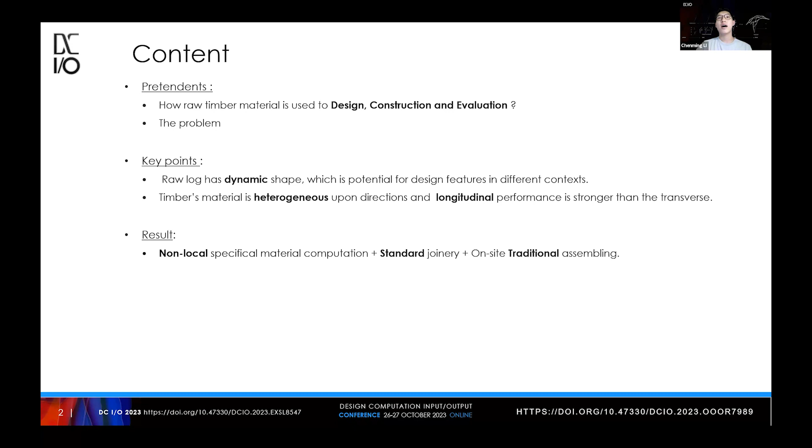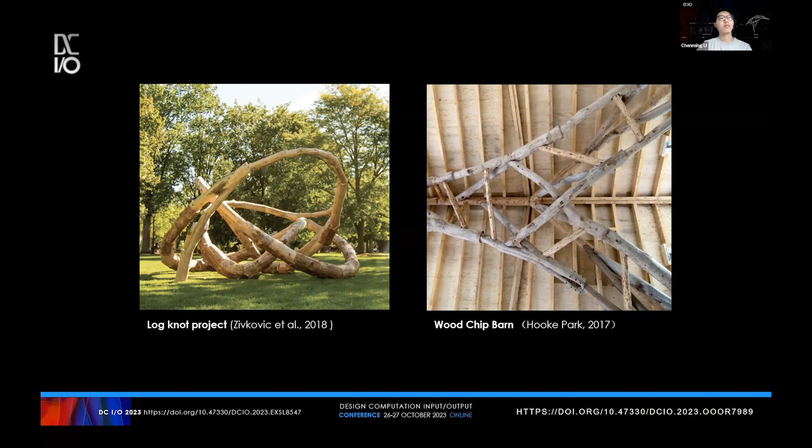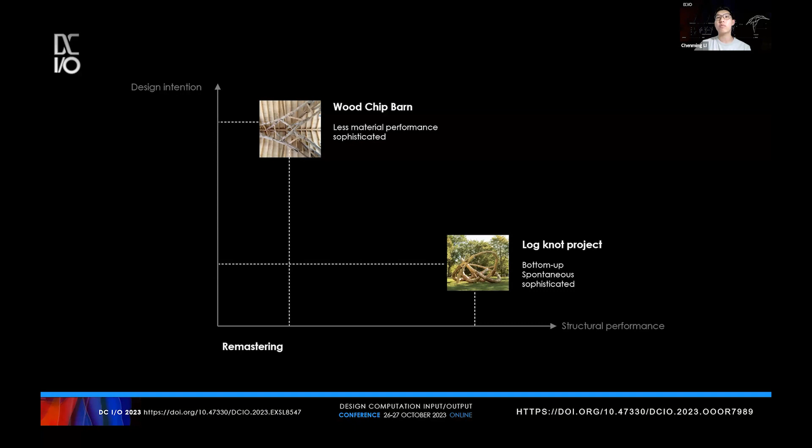I would like to show two cases demonstrating research in the timber log field. Researchers are exploring the potential of timber's natural shape in design features and structural performance. By studying the characteristics of round logs in various shapes, they develop design possibilities that can be applied in different contexts with unique design features. However, the limitations of working with round logs are becoming increasingly obvious, including the replication of design features and structural performance. In comparison, the log knot project based on a bottom-up logic is particularly challenging due to the shape of the material and is more dependent on the material's natural shape. And in another project, the materials are not very well aligned with the neighboring elements.

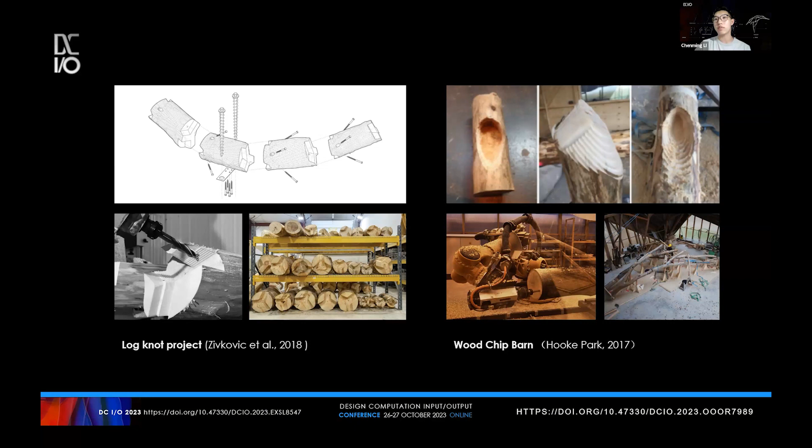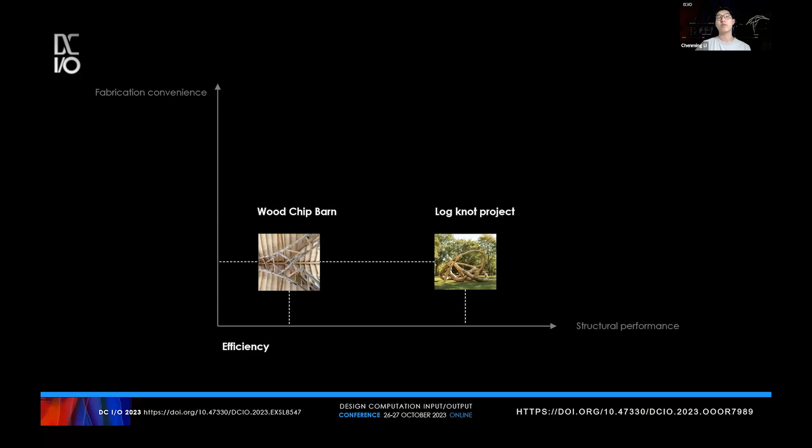In terms of efficiency, the use of a robotic arm for complex joinery provides stability and accuracy during the installation process. However, this approach can be time-consuming and may not be suitable for low-tech traditional craftsmanship, which is commonly used on real-life construction sites. Previous research has been limited by the need for high construction accuracy and the use of sophisticated machinery, resulting in inflexible, slow, and non-recyclable designs.

In contrast, our method aims to achieve material simplicity and convenient processing with minimum equipment requirements. This approach aims to achieve not only alignment between the digital design and the physical model, but also efficiency in the construction process. Additionally, our design philosophy emphasizes maximizing axial alignment, which takes advantage of the material's natural strength properties and results in structurally efficient elements, striking a balance between efficiency and accuracy, allowing a faster and more flexible installation process while still maintaining the required precision.

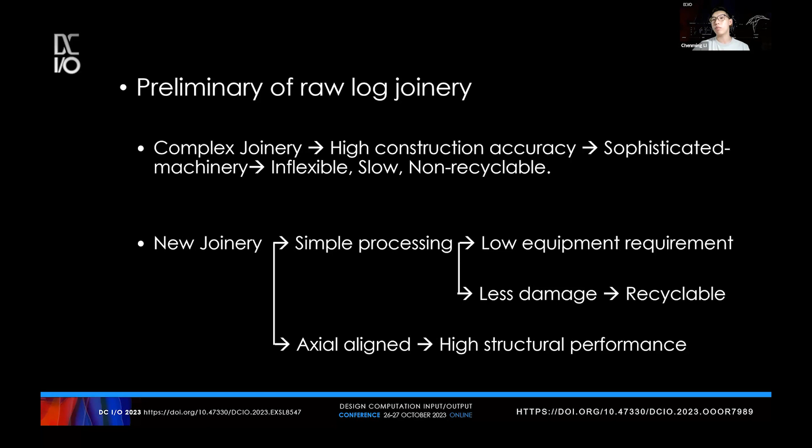Based on the timber axial performance feature, this joinery prototype was designed to allow elements A and B on each side to rotate independently while maintaining structural continuity. This design enables the timber elements to rotate without compromising their structural performance, providing enhanced flexibility for the overall structure.

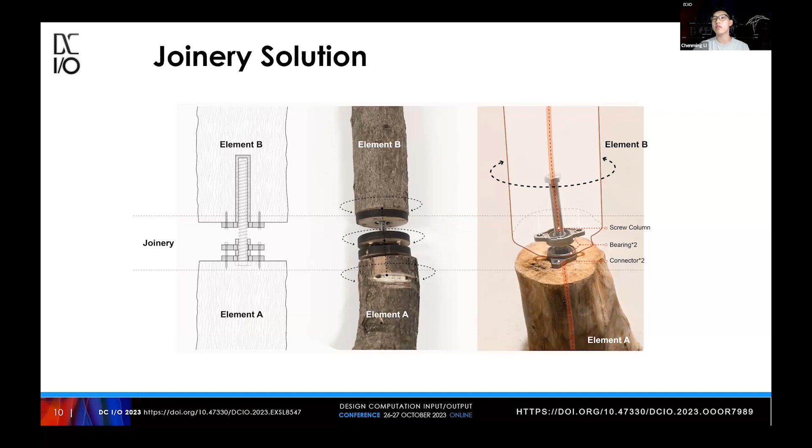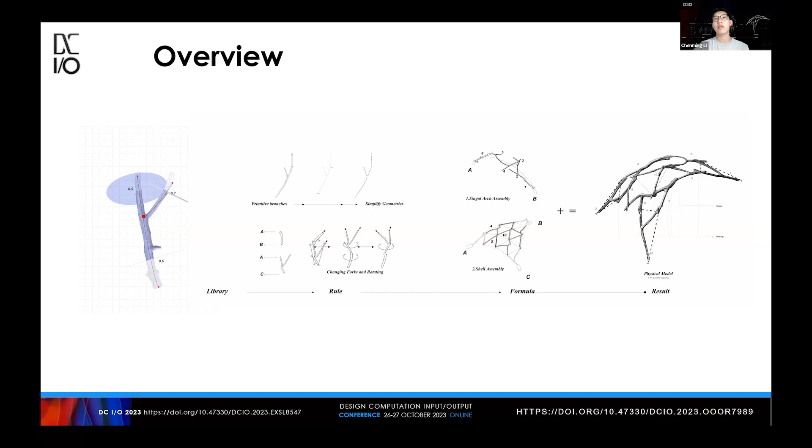The method section consists of three parts: dataset, algorithm, and prototype testing. For the system overview, the input is a dataset of branch geometry and guiding shapes, which are used to drive the algorithm. The black box algorithm integrates rules of rotation and alignment with evolutionary computing tools, Kangaroo, Wallacei, and Galapagos in Grasshopper. The output is a set of customized fabrication details and assembly solutions that can be used to construct the desired structures. The dataset of branches is set up first with branches and forks, abstracting and sorting them into I shapes and Y shapes.

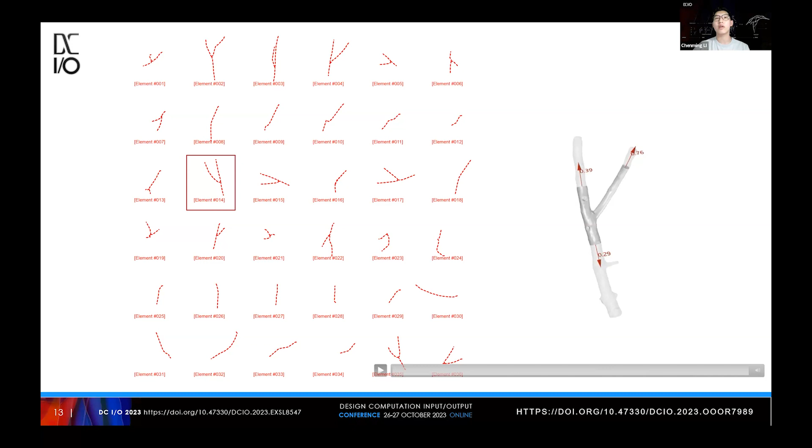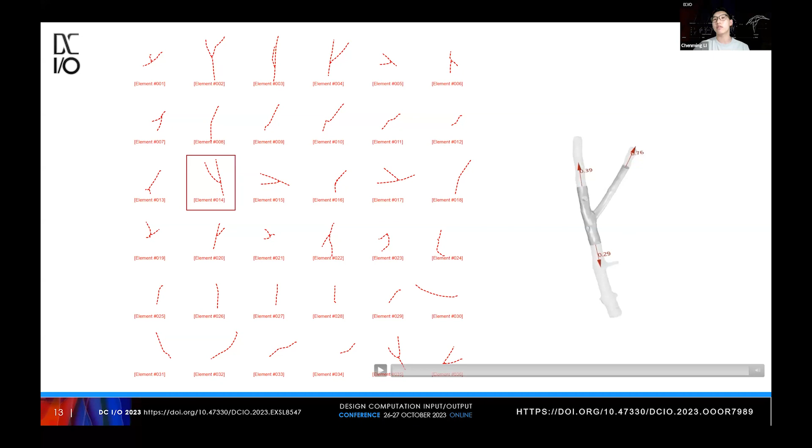The animation on the right side showcases the directional potential of cutting the branches at various positions, even within the same fork. This demonstrates the fabrication possibility to meet the design feature, providing more options. Using this animation, you can evaluate different cutting positions within the same fork to achieve the desired design feature and performance. Here is a recording of the arch prototype digital assembly. The whole arch's elements are considered at the same time, from one side to the other.

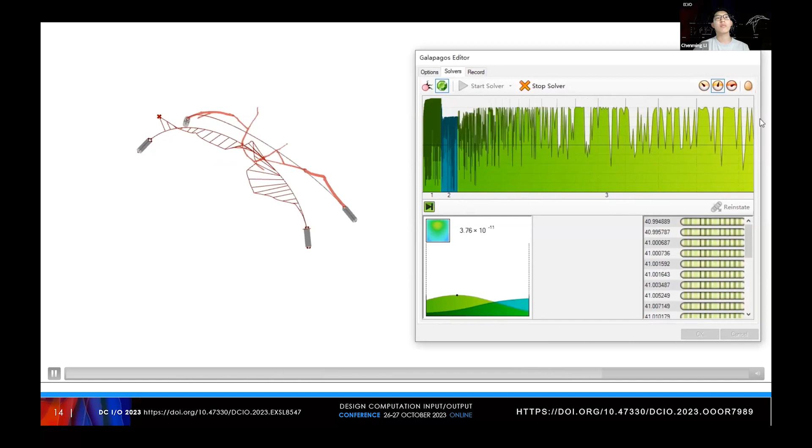With each placement, there are three degrees of freedom. Branch selection chooses suitable branches from the dataset to form the framework. Rotation angle optimizes the angle of the branches to achieve better structural performance. And treatment position affects the ending direction and stability.

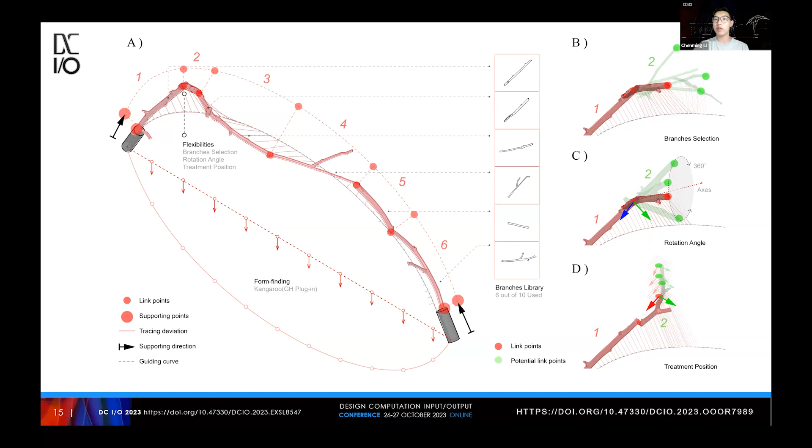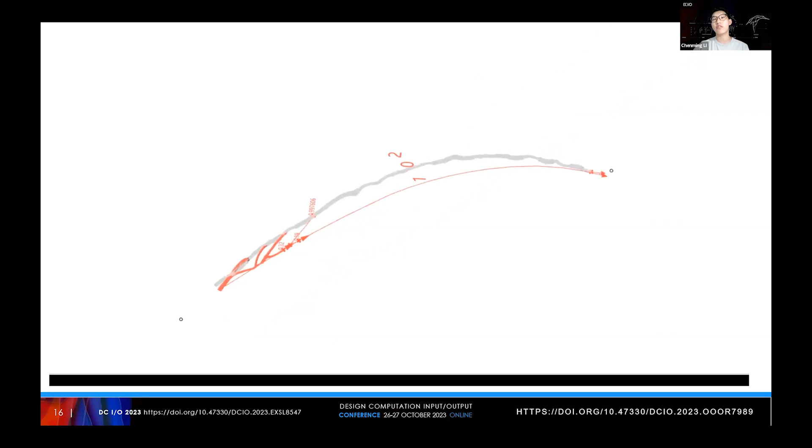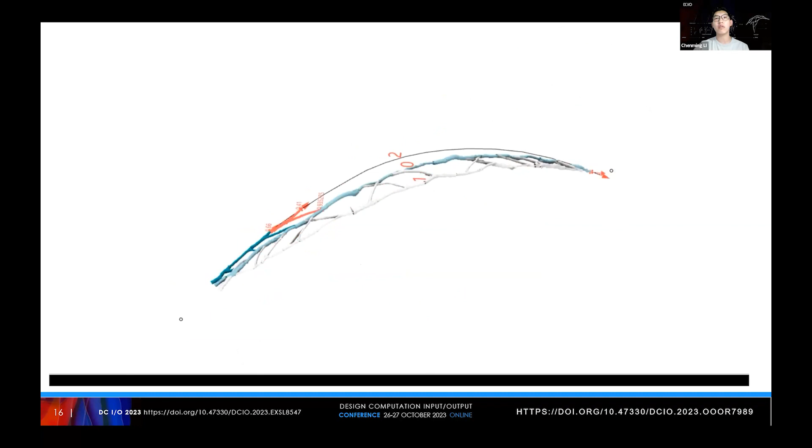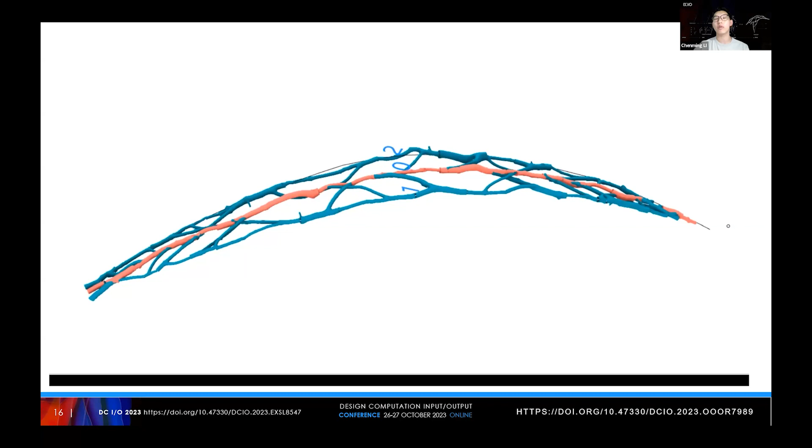The single curvature system was upgraded to a truss-like shape to enhance its performance. The system was also tested with multiple related guiding geometries. Additionally, the prototype used two categories of logs, I-shaped branches and Y-shaped forks. The I-shapes form the main columns, and the Y-shapes are the secondary columns. After the arch test, we conducted an experiment involving a triangular dome guided by surface geometry, which allowed us to further assess the feasibility of our system design in a more complex scenario.

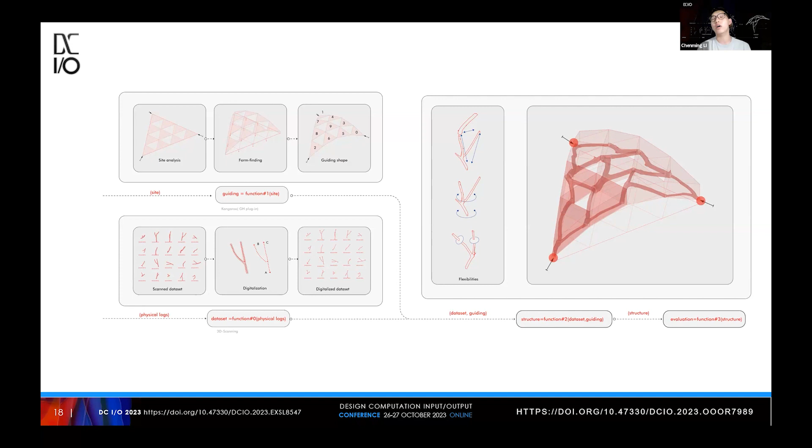For the triangular system, the input and outcome are similar to the previous ones, and the input includes a form-finding framework based on the context. The library of Y forks is set up first, and the flexibility of each placement is considered as branch selection, trimming position, and rotation angle. The computation follows physical logic, starting from the lower framework units, and sequentially the system uses the generated ones as an existing condition to generate the middle units, layer by layer.

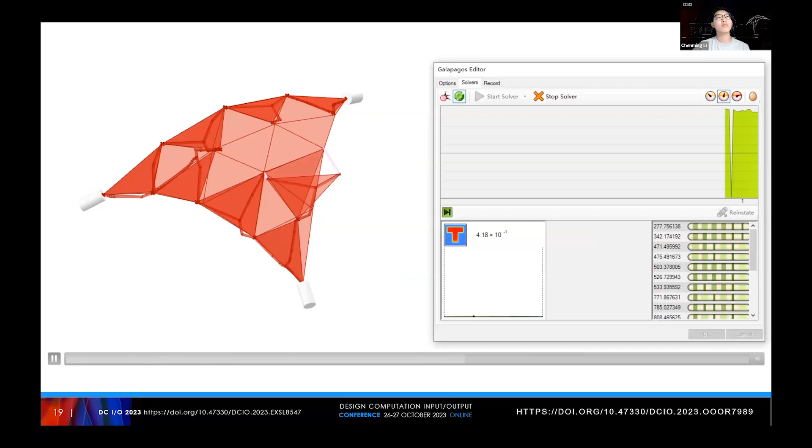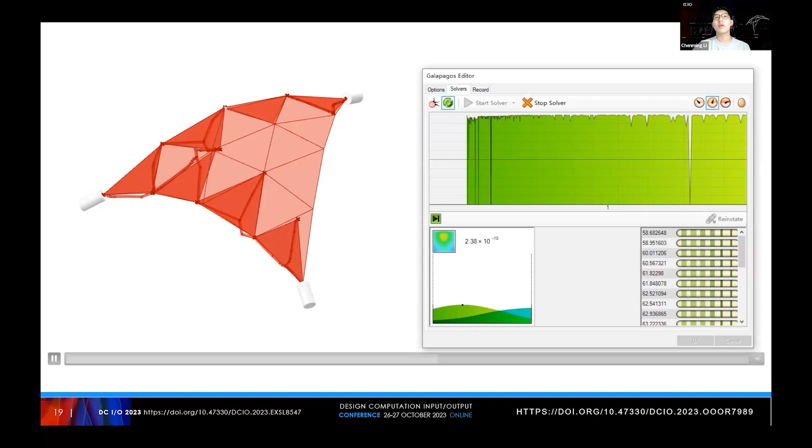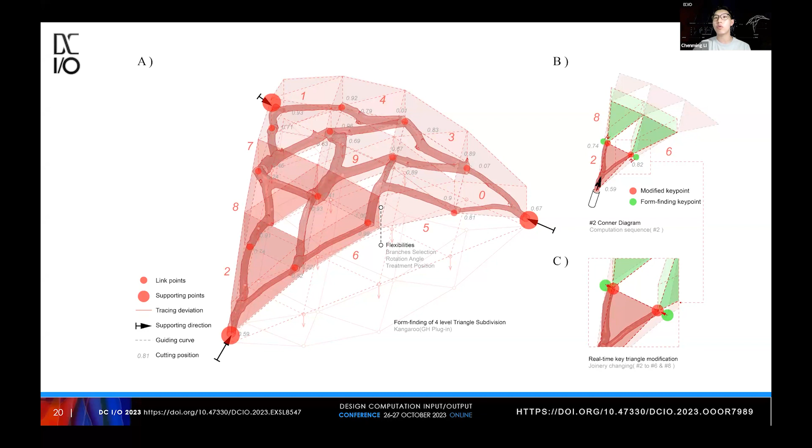The target triangle can be modified based on the generated ones. If the endpoint of the branch does not match the target point, the generated point becomes the new reference point in the following computation to minimize the deviation. The result includes the cutting positions for fabrication. This information can be marked on the materials, which allows a simple trim treatment; with the help of the new joinery, installation requirements can be met with a simple flat trim.

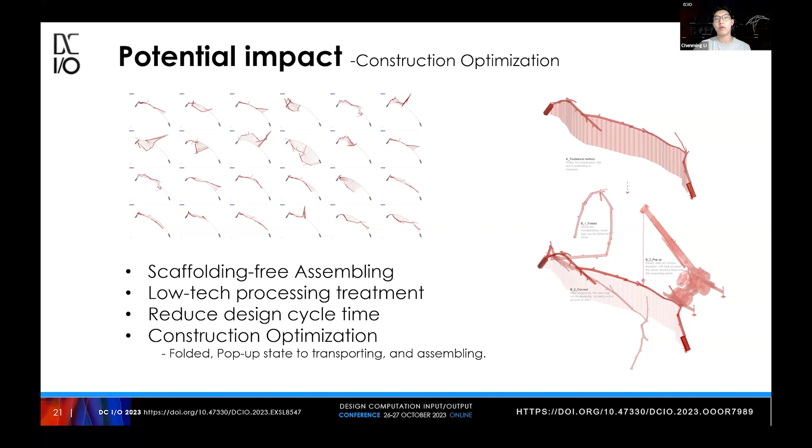With the computation, we have multiple solutions based on the same branch selection and trimming, which provides us with options. The first one is a solution with minimum volume, which can help reduce transportation difficulty because the material occupies less space during transportation. The second one, the flat solution, can assist in on-site assembly because the shape is easier to manipulate on site and requires less structural support during construction. The third one optimizes both, so minimized volume and flattened shape are possible. This workflow can potentially maximize the benefit across not only the design, but also the transportation and assembly stages.

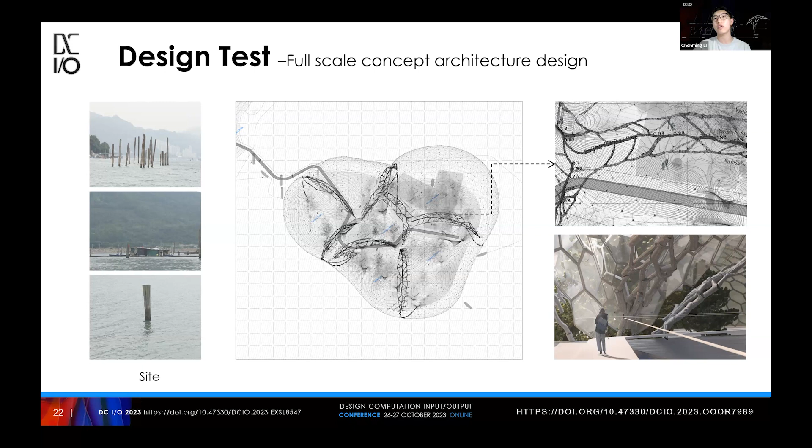This method can also be demonstrated on a specific site at a large scale, incorporating two prototypes, namely trusses and surface, with the primary structural elements designed according to the truss arch logic, and the envelope shaped by the surface guiding logic.